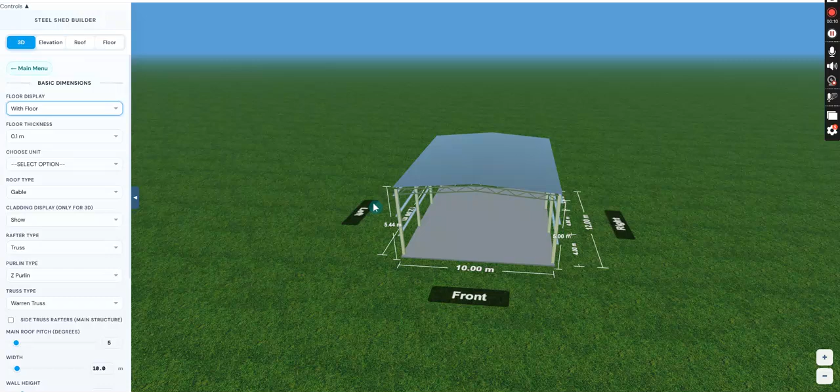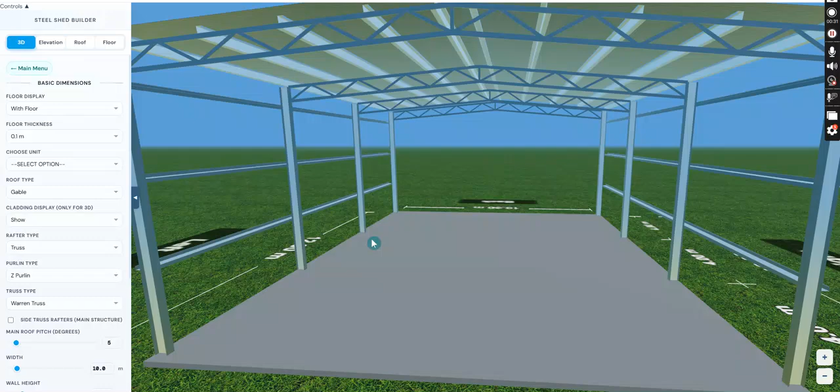So let's go to the... For the steel shed the entire manual is the same, just the material will be steel and the columns will be UB columns, and there will be a truss or it can be a UB rafter.

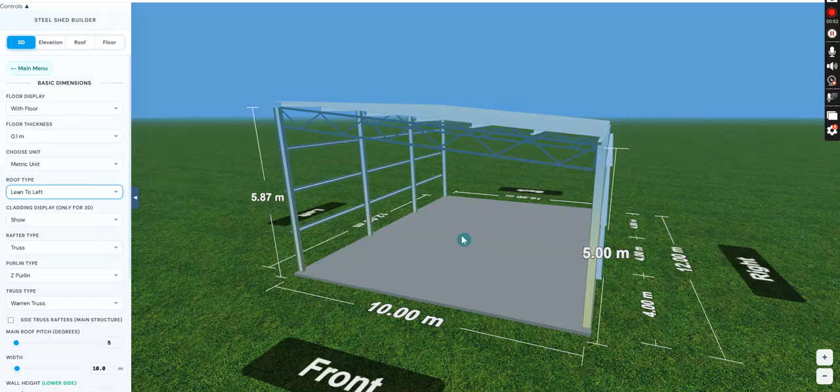So let's go to the basic dimensions and we can select the floor thickness, units will be metric, and roof type will be lean-to. And as you can see, the shape of the girts and purlins, and the rafter type. There's an option of both UB and we can choose truss.

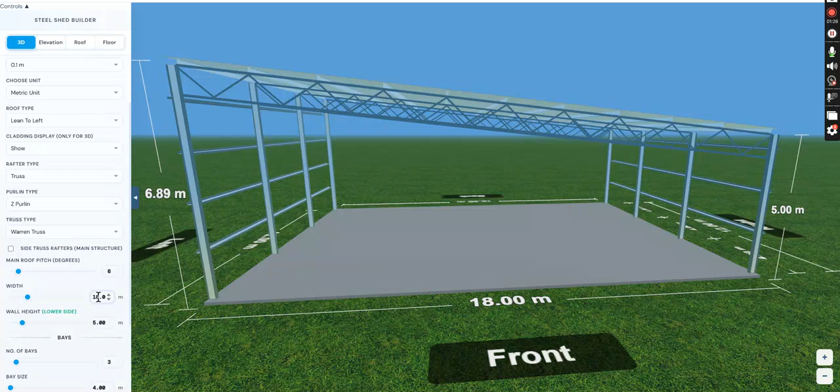So the roof pitch will be 6 degrees and the width of the shed is 18 meters. Wall height is 5 meters. Number of bays will be 5 and bay spacing is 6 meters.

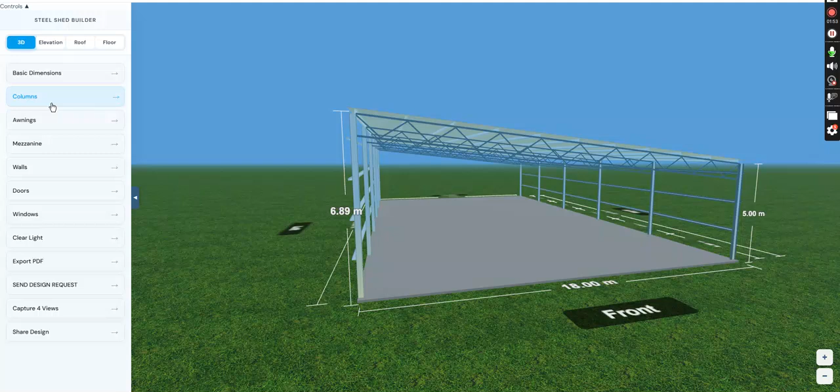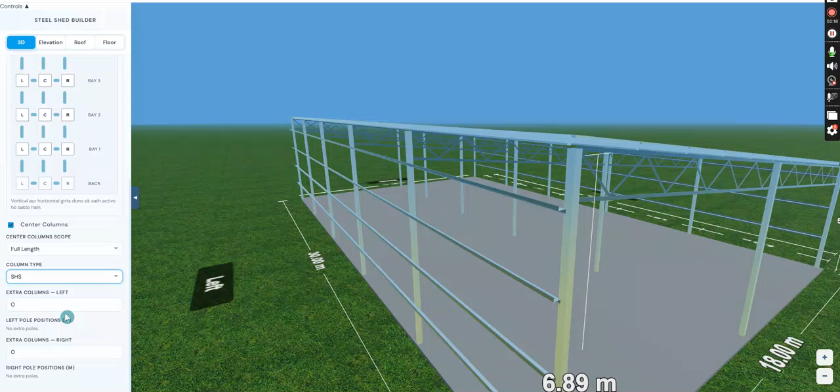Okay, let's go to the columns and we can add center columns as mullions, and column type. You can add the column type. It can be UB and it can be SHS columns. So we will select the UB columns for now.

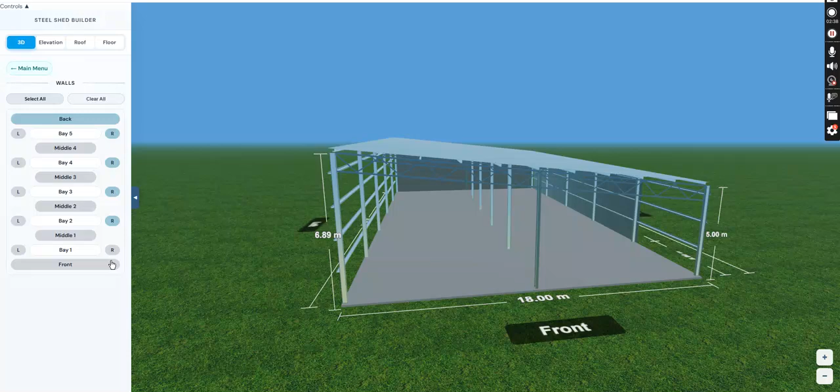Let's go add some walls as this is a front open shed. And we can remove these girts, for which we have to go to the columns tab and then choose which side of the girts you want to remove. This is the left side, so click on the left vertical bars like this.

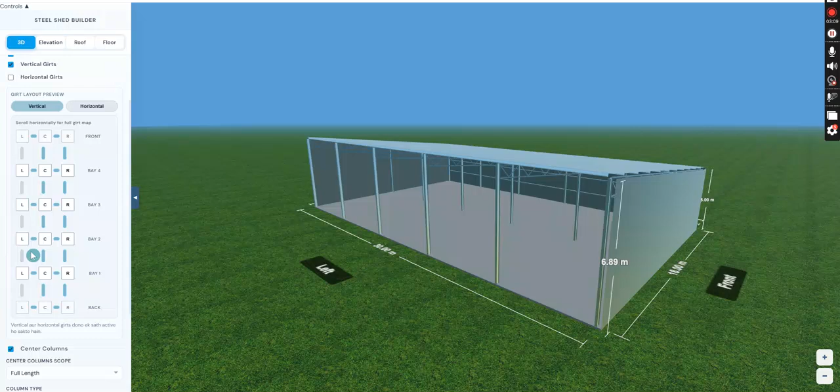And this is how you can make a lean-to front open 3D shed at engineers.com.